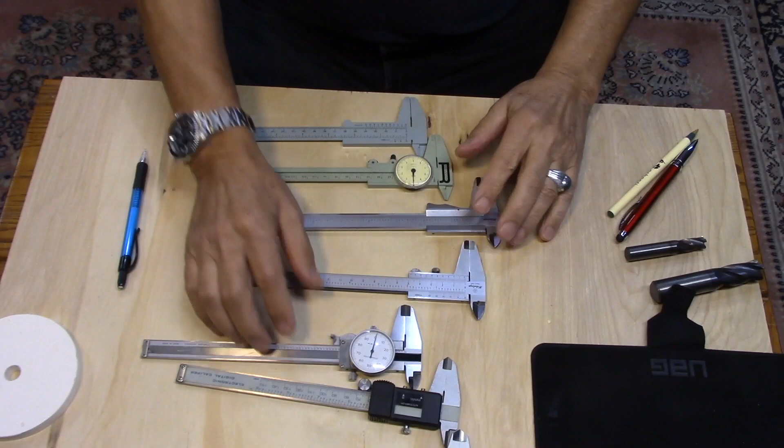Okay, here we have, I got about 7 different ones here that we're going to go through very quickly, just to show you what I have. So the first one, this one here, is basically a Vernier Caliper, and it's plastic. It's made in Taiwan. It's kind of cheap material, cheap vernier.

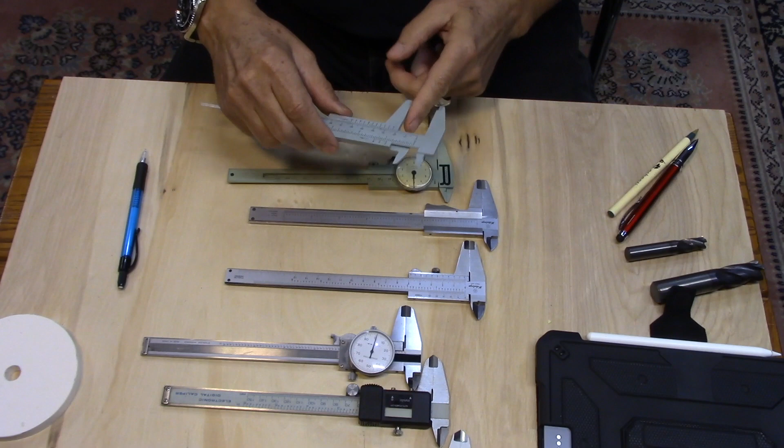I don't use it much. The reason that it's plastic, like if you're doing any faceting, they're saying, okay, you can put your facet in, you measure so it doesn't damage, but I don't use it. When I do faceting, I use the regular one. So if you don't use it as a vice grip, then that will work for you.

Okay, the other one that I have, this one here, it's also in millimeters, but this is a dial caliper. So a dial caliper, where when you move or try to measure anything, you have the dial here that's going to be giving you the dimension that you want. That's a dial, but this here is metric only.

Now, this one here is the Mitutoyo caliper and vernier, and it has only inches. So this one here is only inches. Then I have this one here, which is also Mitutoyo, but it has both. It has metric at the bottom and inches on the top. So you could use both of them.

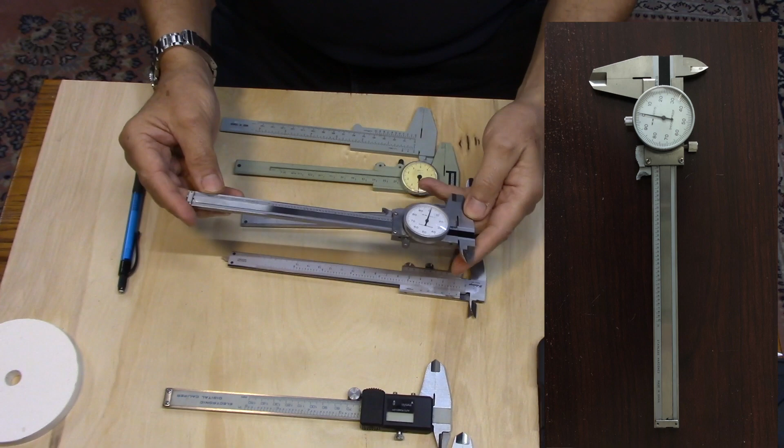Then there's another dial caliper, which has the dial indicator, and this is only inches. This is made in China. So when you turn it, every time you get the dimension, you can read it from the indicator. You get the points here and then the indicator there. So it's another one.

Then we have the digital caliper. So the digital caliper, this one has metric and inches also, and when you put it on, you could actually change it from metric to inches anytime you want, but we're going to go through how you use it later on.

This is another one also, a digital caliper, that's from Mitutoyo. As you can see here, there are no numbers, inches or metric. However, this one also will change from inches to metric by pushing the button here.

Now the other one that I showed you before, this one here has the numbers, metric and inches on it. This one has nothing really, but it acts the same because you're not using these numbers, you're just using the readout, so you can read the dimension that you have. But we're going to go through all of them. Now, this one here I'm just going to put aside because we're not going to talk about it.

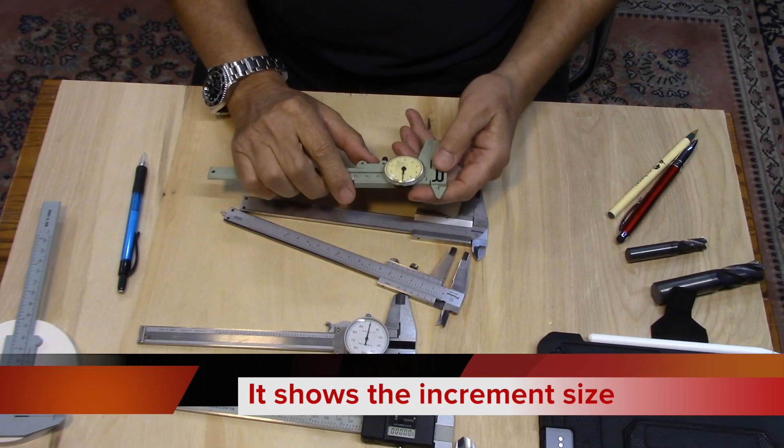The dial, if I look at this dial, which is metric, most of the tools, even this plastic one I really don't use, all of them actually show you how you read them, every segment or every line, how you can count it. So first, actually, before we go into this, let me show you how you can use the verniers.

First, how can you measure? What do you use it for? So I'm going to take one. Let's say this here. It's a simple one. So now we know that here is where you can measure everything. So you go in and you measure anything. So I have this one here. I'm going to go in and measure it that way, and I get my reading, which is fine. But then you have more than just this.

For instance, what is this for? This one here is to basically measure the inside diameter of something. So if I have this one here, I got a hole in the center.

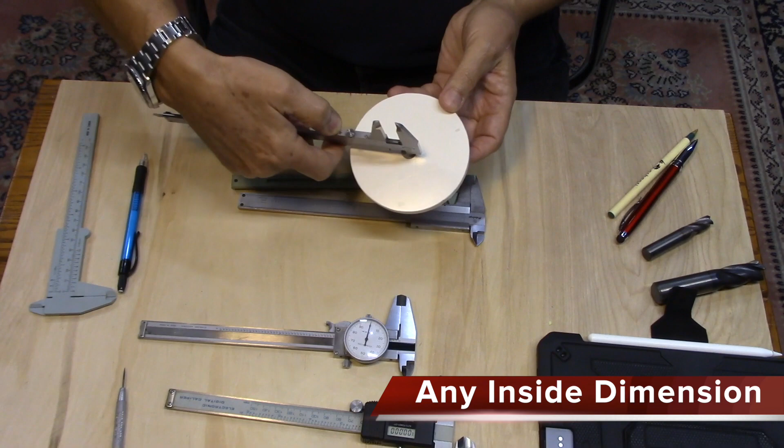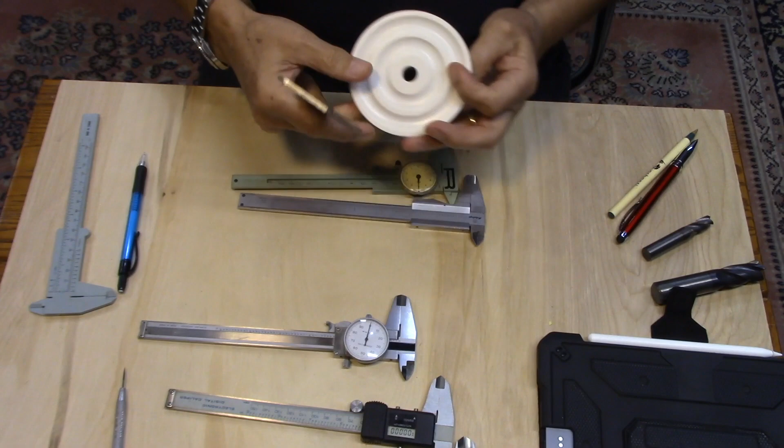Well, what do we use it for? Let's see. When it's set flat here, that's set to 0. So if I want to check the depth here, what I'm going to do is I'm just going to go from this point and I'm just going to set it up right here and go in like that. Okay, so then I can get the depth dimension it's giving here.

If you notice right here, there is a little relief at the bottom here, right there. So there is a relief, and that relief is for when you have something here at the bottom or at the corner where you're checking, you could just put it up that way. So this way you can measure without hitting any chamfer at the bottom, so you go like this and here you are. So you can measure this way.

So now we have this one here: inside diameter, depth of something. So you could also use this one, especially if you have something that is closed. You can always go from the top and measure the depth. Okay, so I can go like this and I can measure the depth, and I know exactly the thickness of this piece. So if you have, let's say, I don't have anything here, but I thought I did.

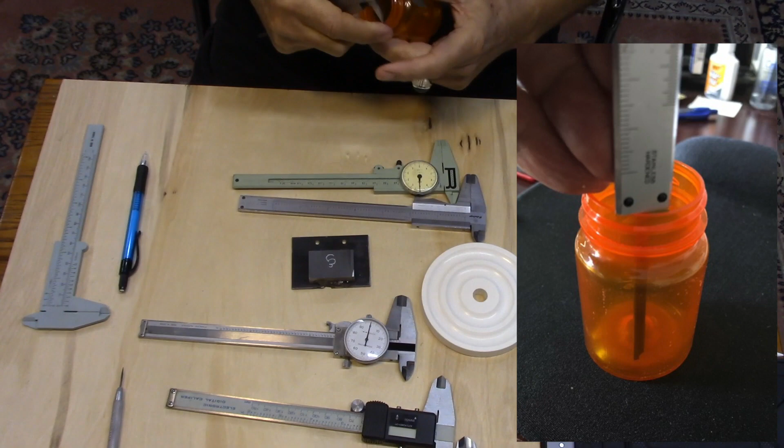Okay, so let's say I need to know the depth of this bottle. All I have to do is go on the side, make sure that it's straight, and go all the way down and check the depth. The dimension is right here, so I can see it. So for any depth that you cannot reach, this one is used, which is the tip.

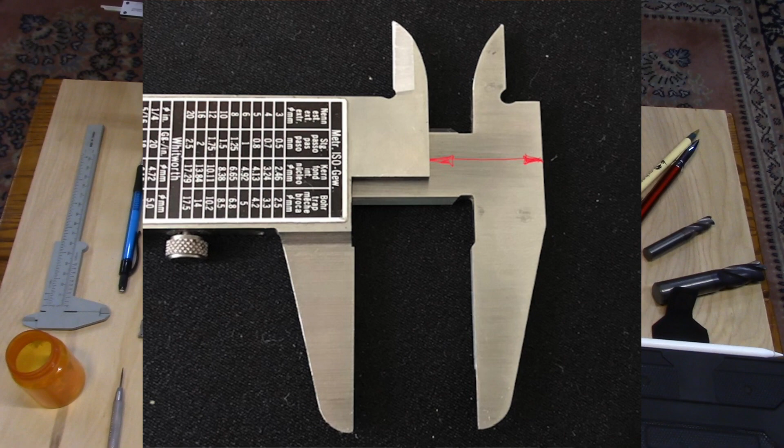Now there is another one that is right on the edge here. So if I use this one as my 0, now every time I move it, I get a dimension right there. So this is my 0, and here it gives me the dimension. So for instance, if I want to check again the depth of this, I can actually set it up right here and here. Push it in. Now I got a dimension.

So same here, I can put it right there, it's at the edge, and move it in, and here I get another dimension. So we're using this one here also for the distance that is blocked. I cannot measure it this way, I cannot measure it this way. I mean, you could, but it won't be accurate. I can measure it this way, yes, but this is mainly used for depth, for holes, okay?

And this here is used for getting these dimensions. So now we know we got 1, 2, 3, 4 different ways to use the vernier. Now all of them are about the same thing. Okay, you could use them. They all have the same features.

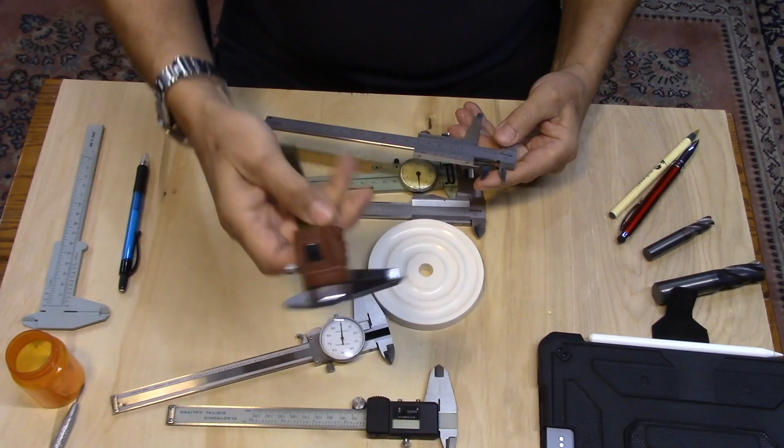Okay, so if I open this one, again I get the tail, the relief down at the bottom. I get the size for the inside diameter. I get the outside dimension, and I get also the distance on the back here. Okay, so these are the different ways that we could use these calipers.

Now, I don't know if you realized that I mentioned vernier and caliper. They're all calipers, but the difference is this is a vernier because it has the small graduations or divisions that give you the fine dimension, or closer dimension to what you need. So this is the vernier.

Now, this is the dial caliper. Okay, so the dial caliper is the same as this one. This is the dial caliper. So we have vernier caliper, dial caliper, and this is the electronic or digital caliper. So we got three different ones. They're all calipers, but they're for different applications.

So one thing that we need to watch out for is these are expensive tools, and I'm not talking about these plastic ones. I'm talking about the Mitutoyo that I have, and they're not cheap, but also they are not a tool that I can use as a wrench or a vice grip. When you measure something, don't push too hard on it. It's very delicate.

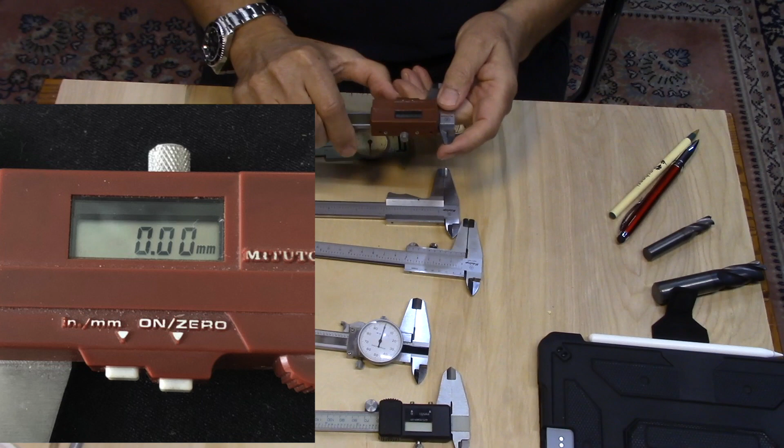nice and clean. The other thing is that if you drop it, you need to readjust it. This one here has a zero adjustment, but that doesn't mean the zero adjustment is going to fix everything, because if you hit it down here, do you know if it is correct or not? Correct. Now, I have these tools. These tools are perfectly ground and exactly to size. Not everybody has them, but most people have drills.

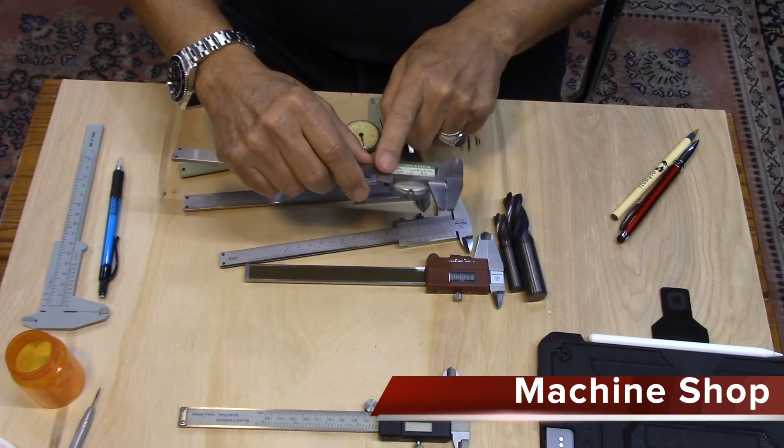So you can get a drill, and actually, let me go back. If you're working with a machining company that uses this tool all the time, they have to have the calibration done on these tools, and it has to be marked, dated, and signed, and done every 6 months. Okay, that's for ISO 9000. So you have to have this one always inspected. If you drop it, you have to take it back and it has to be re-inspected again.

But for us here at home, we don't have that luxury to give it to an inspection department so they can check it and make sure that it's correct. So what we're doing is, here I'm using these tools. And actually, I wasn't going to talk about this, but John Daniel mentioned it on Facebook, and I figured, okay, I gotta show you guys. He mentioned gauge blocks.

The inspection department usually has gauge blocks, but he said, well, if you don't have gauge blocks, which is a good idea, you could use tools like this. And if you don't have these, you could use a drill. But don't take any drill that's been used and is all marked up on the outside. Get a new drill. You know the size of it, and you just measure and see exactly where you're at. So that's a way you can actually adjust your calipers.

And if you look here, I'm going to get a closer look at this one in a little while, but the dimension, and I'm talking about metric now, this one has both metric and inches. So if we're looking at the metric dimensions, you could see the numbers on the top here, and each one is 10 millimeters. So this is 10 millimeters, 20, 30, 40, 50, and so forth.

Within the 10 millimeters, there is another line down here in the middle, which is 5 millimeters. It's a little bit longer, so it shows you the halfway point of the 10 millimeters. Let me show you this one here bigger. Okay, now you could see it. So, like I was saying, this is 10 millimeters.

The longer line here, which is 5 millimeters, 10, 15, 20, 25, 30 millimeters. Then we could see all these lines down here, which is also graduated, and it has up to 10. Now what's good about metric is everything is divided by 10. So now this from 0 to 10 is a division of 1 millimeter. So every millimeter is divided here into 10.

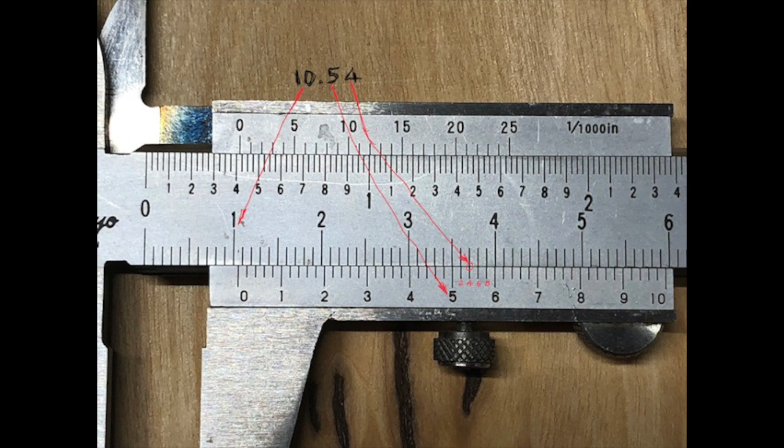10 millimeter, 0.5. Back to here. 0.5. And I figured that this one is closer. Okay. So I will take 0.5 to 4. Okay, so that's 0.54. Okay, let's take another example.

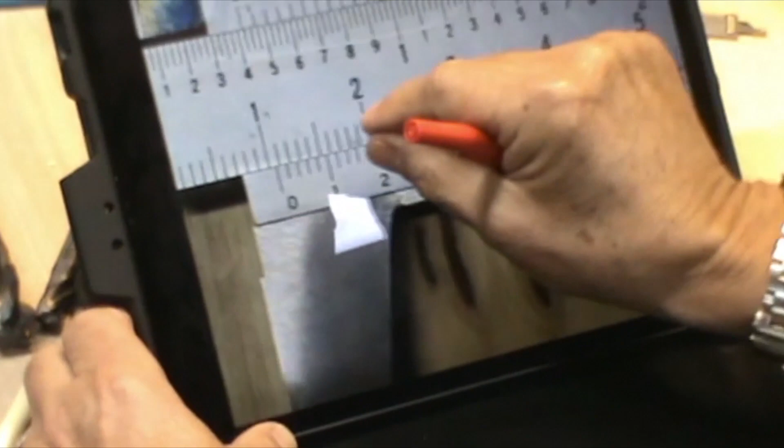Here's another example. Again, we're about the same area here, but if I look at this, I'm a little bit even over the half of that millimeter. So I know it's after the 5. So this is 10 millimeter point. Let's go back. Here is the 5, and here is the 6. Again, the

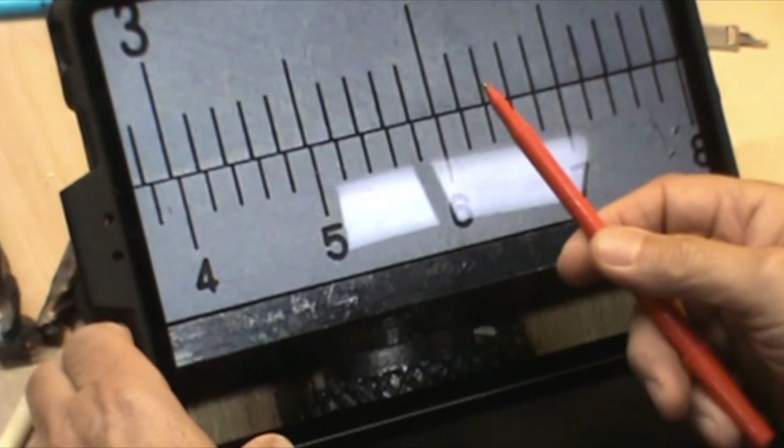dimension is, if I look at which one is the closest, now the 6 is over this way, but if I go to the 7, it's inside. So between the 5 and the 7 it's this way, and if I take the 6, it's in. So I know my dimension is between the 6 and the 7, right here. So the dimension is going to be 10 millimeter, 0.6 something.

So if this is 6, what is the closest number? I could see this one here or that one there. You can decide. The difference is so minimal here that for your dimension, I will say 2, 4, 6 right here. So that's 10 millimeter, 0.66. Does that make sense? Here you go. So 10 millimeter in the front, 0.6 and 6.

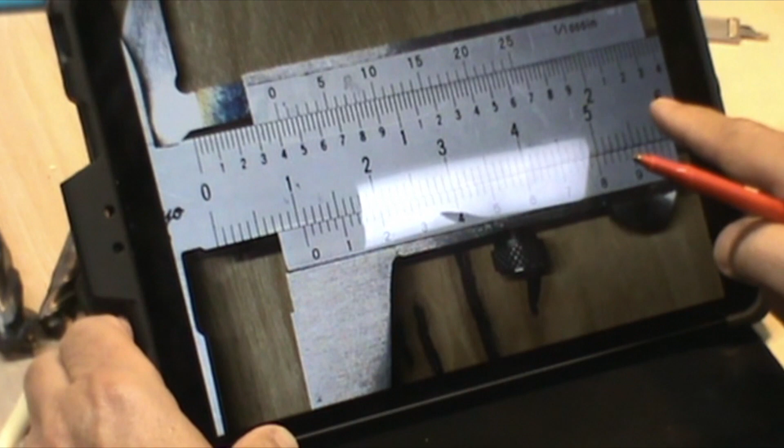So this is the way you actually measure with the metric system. That's how you use the bottom portion and the top portion. So going back to this, we know that everything is divided into 10 millimeters for each number on the top here. Each 10 millimeter has 10 divisions, with the 5 in the center a little bit higher than the other ones. We have the 0 point, which is this one here, that if you close the vernier, it will be at 0, lined up.

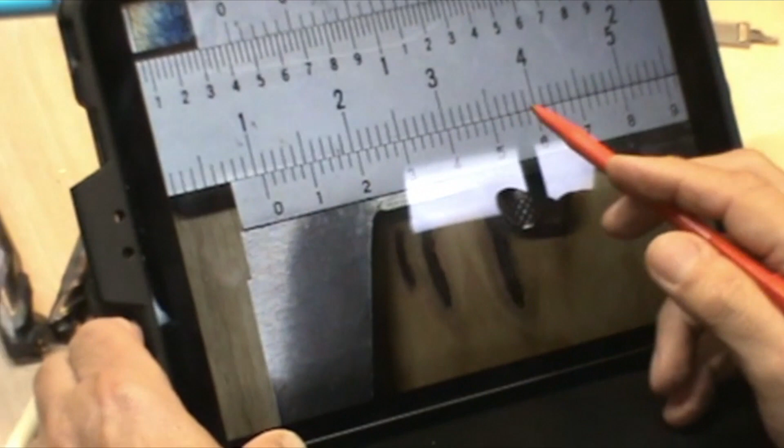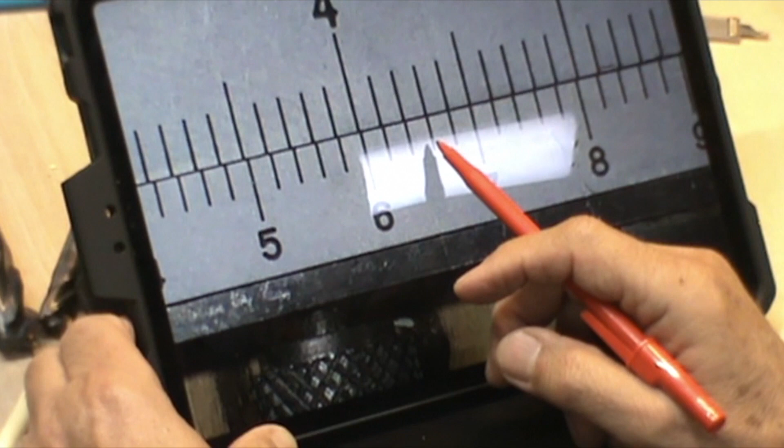And then when you open it, you check from that 0 point where you are on this millimeter. So this one here is 10 millimeter, 0.5 something, and that's the first one we did. And this is the second one. It's a little bit more than the 5, so we found out it's between 6 and 7. So it's got to be somewhere around here, and sure enough it was 6, then another 6 or 7. If I have this one more in line between these two, I could say 0.67, because it's 2, 4, 6 up to this point, and if it's between these two, that will make it 7.

Okay, so that's the side here. So if we're using this one here, this is my 0 point. So when I go here, it's lining up at 0, and then I go in and check any dimension I want, reading the smaller increment down here at the bottom, and that will show me exactly what I need.

Okay, so this one here, it's a lock-in screw. So I can go and get any dimensions, lock it in position, and that's gonna hold it from moving. Just held like this, and it's gonna stay. If you need to go and measure something else, see if it's the same or not, then you'll be able to lock it in position. Okay, so that's one.

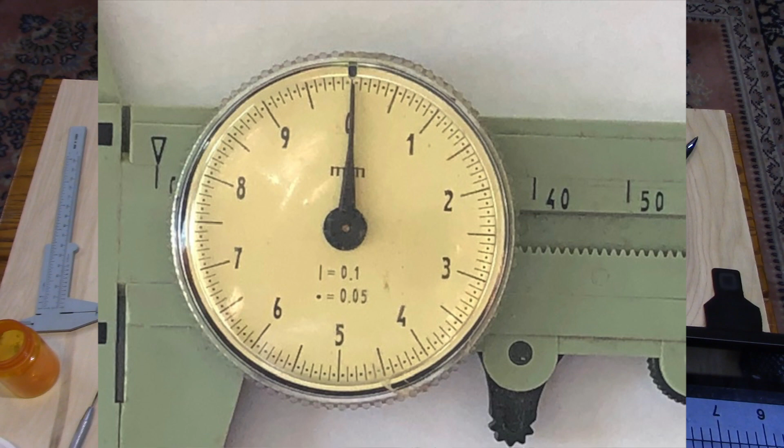The dial indicator, which is this. Again, because we're talking about metric, I'm going to use this plastic one. This is a dial indicator, so that's a dial caliper. Again, you could use inside diameter, the outside here, from here to there. You have also the tail measurement for inside dimensions.

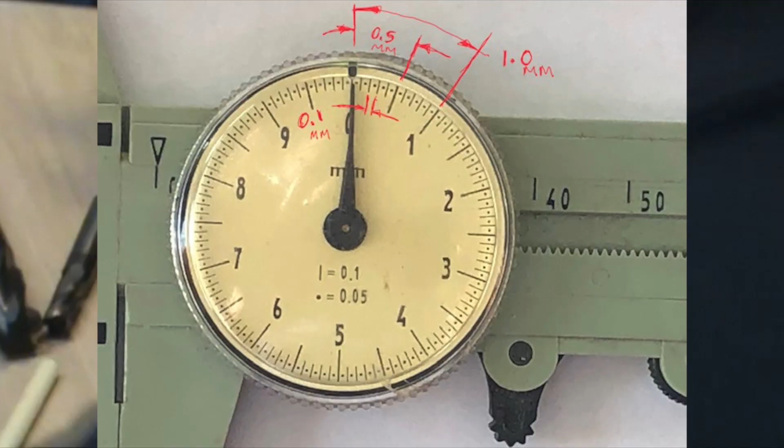Now, this one here, each rotation or revolution is 10 millimeters. So if I go to 0 here, that means I got 10 millimeters. So each division in between is 1 millimeter. So this is, if I go back here, this is 1 millimeter right there. Let me show you that on a bigger one.

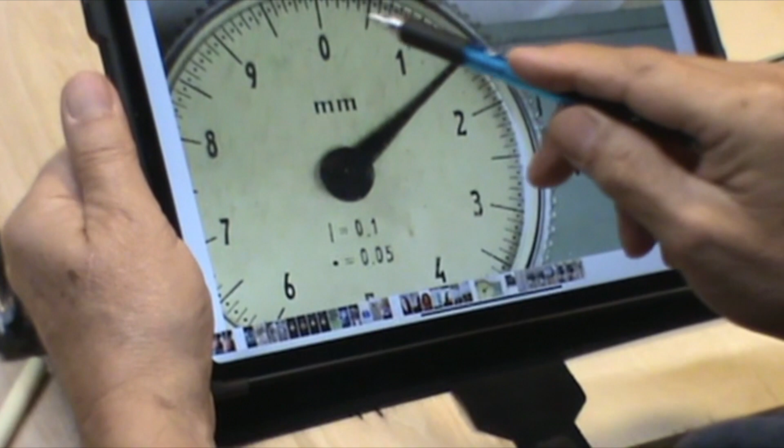Here it is. So each one, if I go like this, that's 1 millimeter. That means that, here you go again, from here to here is 1 millimeter. Okay? It's like this. That's 1 millimeter. 1 millimeter, 2 millimeter, 3, 4, 5, 6, 7, 8, 9, 10 millimeters.

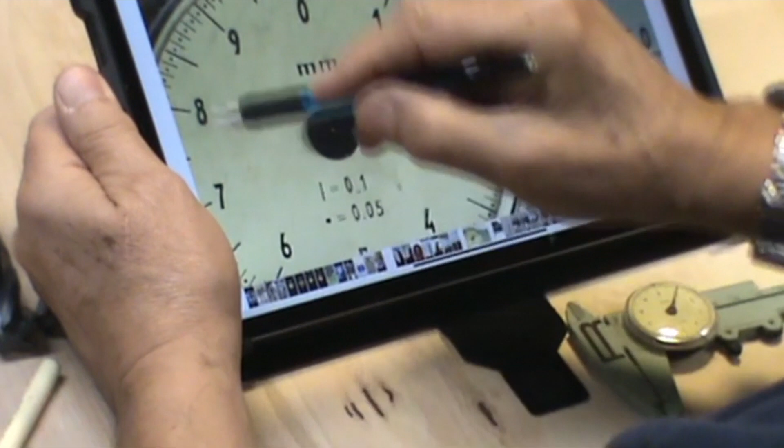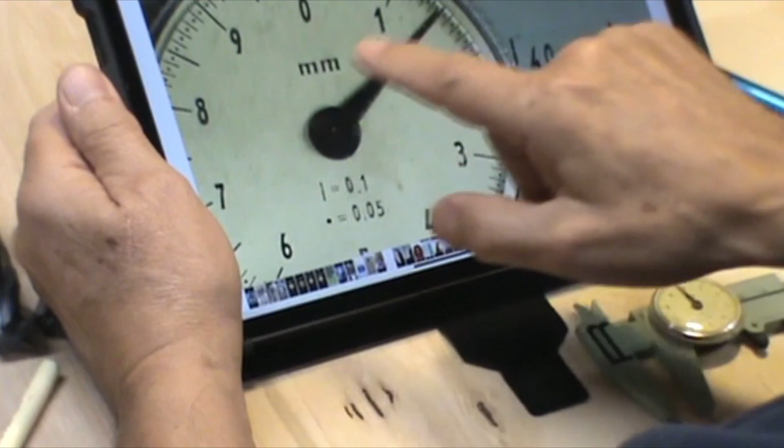So again, this one here, each full revolution is, we said, 10 millimeters. Okay. So when the dial turns around from 0 back to 0, that's exactly 10 millimeters. If, let's say, we're going from 0 to here, so this will be 1 millimeter point 1, 2, 3, 4, 5. That's a millimeter and a half right there.

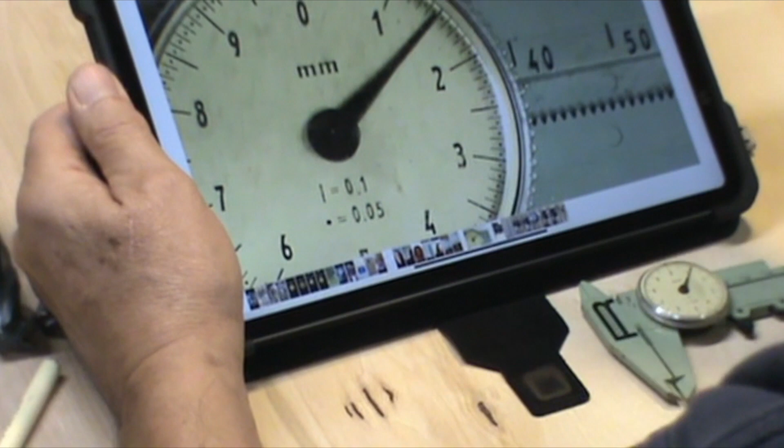1 millimeter and 5, 1, 2, 3, 4, 1, 2, 3, 4, 5.5 up to here, or 5.5 is on the dial. So 5.5, 6, 6.5, 7, 7.5, 8, and so forth. Keep going with that. So this is the dial indicator.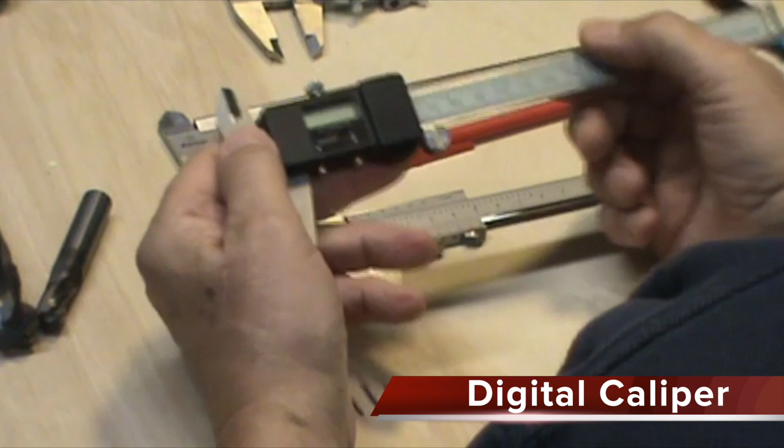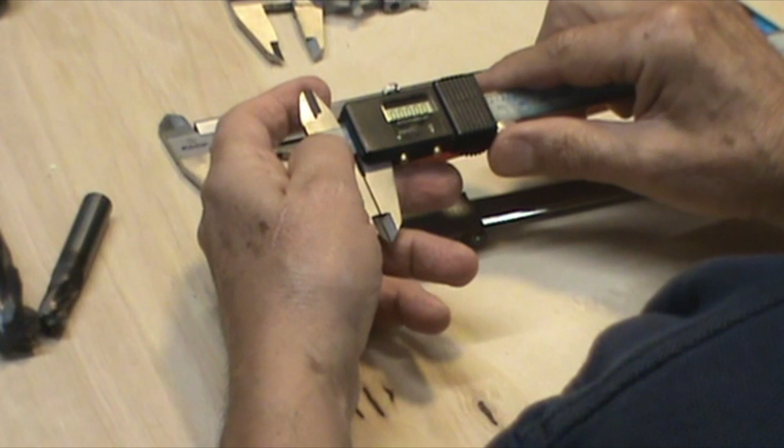Okay, this over here is, again, metric and inches. We have the millimeter and inches buttons right here. The 0 is the setting right there. So if I push this one here, it will show me that this is millimeter. If I push it again, it will show me that this is inches. If I push this one here, it will go to 0. So it doesn't matter where I have it, I can push this one and it will go back to 0.

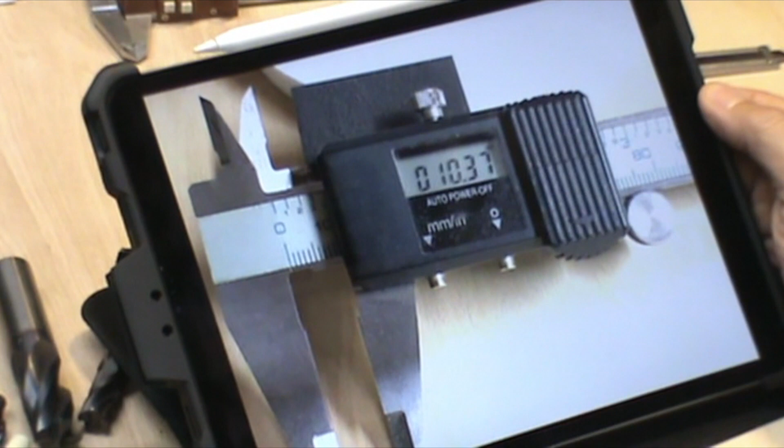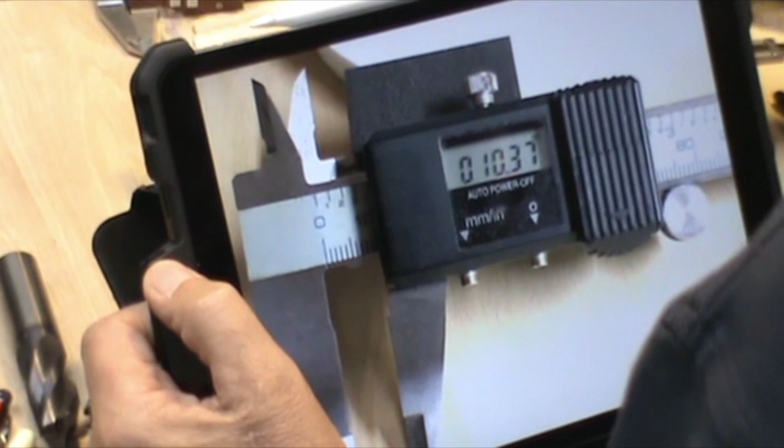Okay? Now, let me get you a closer look. So that's 10 millimeter, 0.37. So this is easy to do. Now, you could see the millimeters right on the top. If I push this one, I don't know if I have another one with the, no. Okay. What is it? Here it is.

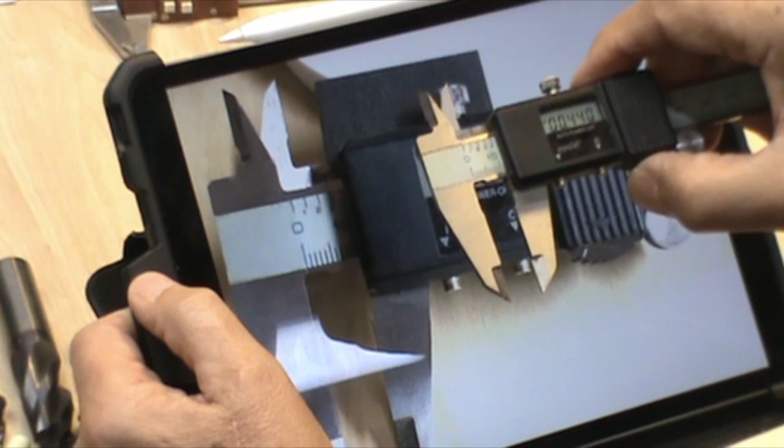So if I push 0, it's 0, and if I go whatever size here, I got 11.17. If I push the millimeter into inches, it will tell me that this is 0.440 inches. So I can change between metric and inches just by pushing that button. Then I go back to 0, set it up to 0.

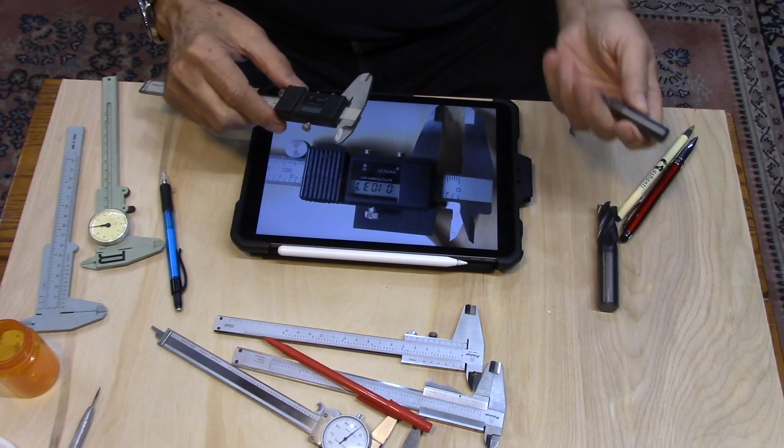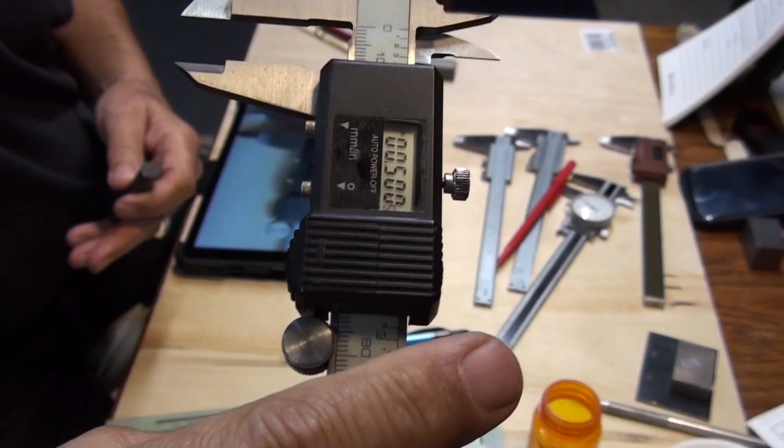Going back to adjusting your dimension. If you drop this one here, I'm going to have it in inches because this is in inches, and it's 0. Then I go in and measure this one here. And that gives me 0.4, actually 0.5 right there. I'm not pressing hard on it. That's 0.5. So I know that this is 0.5. My measurement here is 0.5. So I know that this is correct. Okay.

Now, the other thing I was talking about, where you could actually set it up to 0 from this point. I'll show you what I'm going to do. If I set this one to 0, we know that this is ½ inch. Now it's 0. If I go and I measure that bigger one, this one was, I believe, 3/4. Yeah, that's 3/4 of an inch.

So if I go back here, that is going to give me basically the difference in the diameter. 250, 249, 250, right there. Okay, so that gives me the difference between the two. Okay, let's talk about this one here again. That's in inches and also in metric.

So any dimension that I take, it's a readout. I'm going to see the dimensions right on the top. So that's a lot easier to basically measure anything and get the reading out. So this one here, it's open at 30.12 millimeters.

So if I press the button down here, it will go from metric to inches. It's going to look like this. Oops, that's the wrong one. It's going to look like this. So when I push this one, it's basically 1.186 of an inch. So you could actually reverse between metric and inches by pressing the button. Okay?

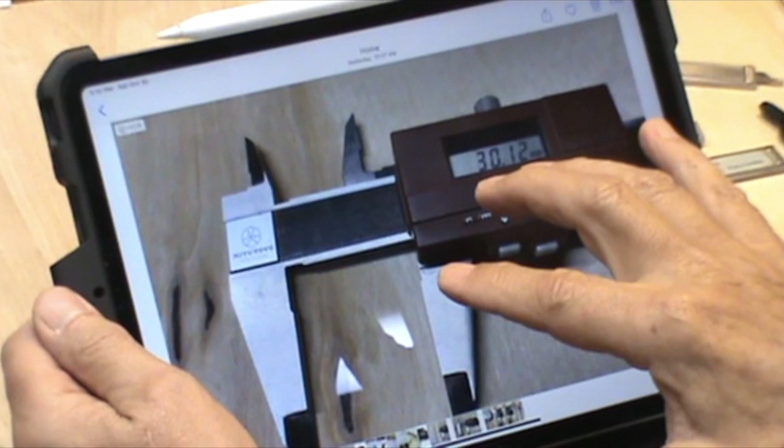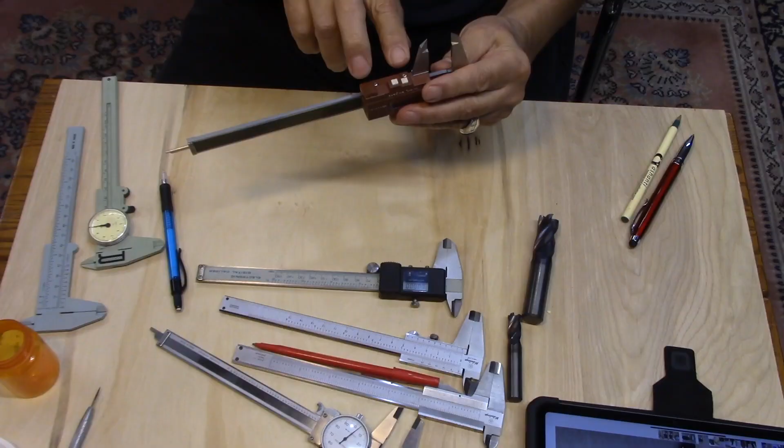Now, these here actually take a battery that is fitted inside. This particular one has 4 bolts, 2 on this side, 2 on the other side. The top comes off and you change the battery on the inside. Again, like I said, there's no graduated line. You don't have to read anything. This is a lot simpler: you get any dimension, any size, and you will read it right here.

The other one is the dial. Now with the dial, you're going to see the dimensions here, and then the decimal point is over here. Okay, so now this is the metric system. And these two, like I said, you basically change and it goes into inches.

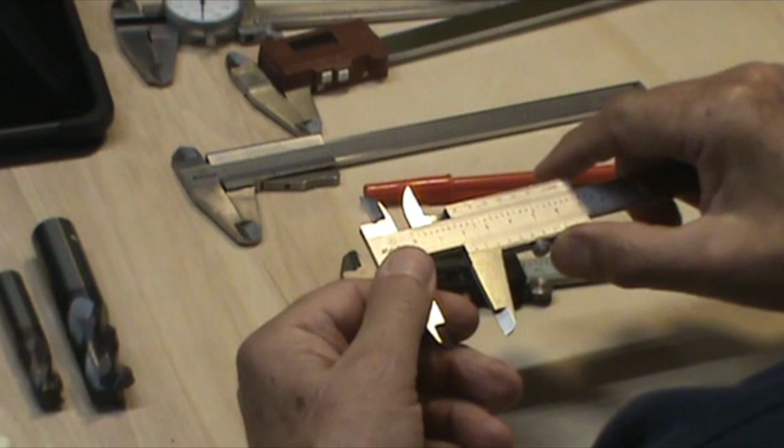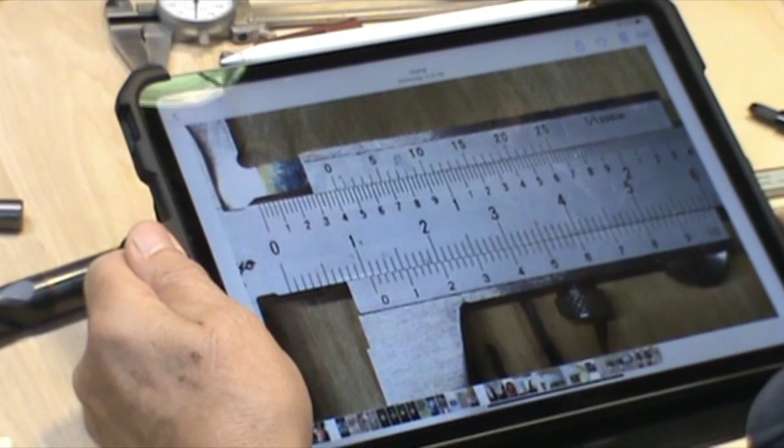But if we have this system here, now I got this one here, it's all inches, but the lines are not as dark as this one. So I'm going to use this on the top to show you the dimensions that we're trying to calculate as inches. Let's see if I can see it back again here. Okay. Let's take this one here first. So now we have the inches on the top.

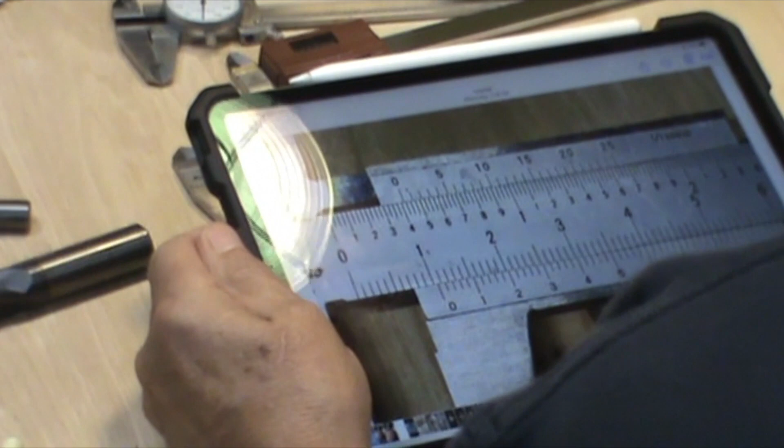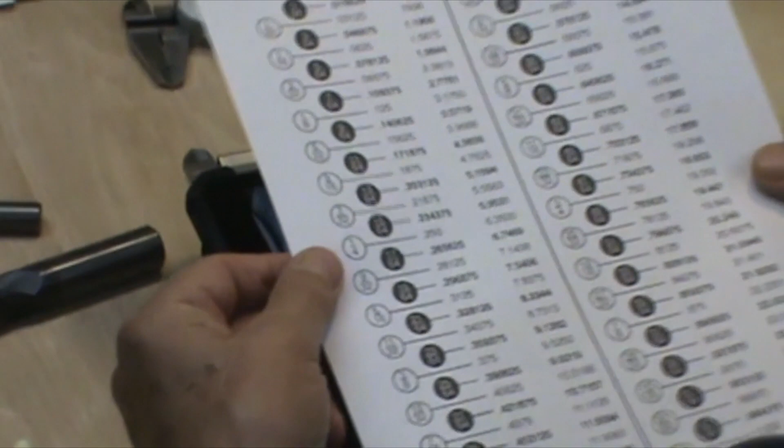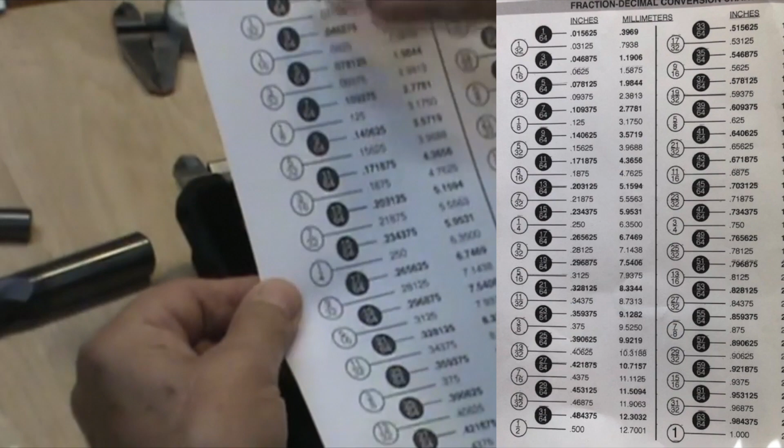Now the inches, it's a little bit difficult. With the metric, I said everything is divided by 10. The inches are more complex. Let me show you. 1 inch is divided into 64ths, 1, 3, 5 64ths, 1/32nd, divided into 16ths, and divided into 8ths, 1/8. So there are a lot of divisions here that you got to go through. The most common ones are the 16ths and the 8ths.

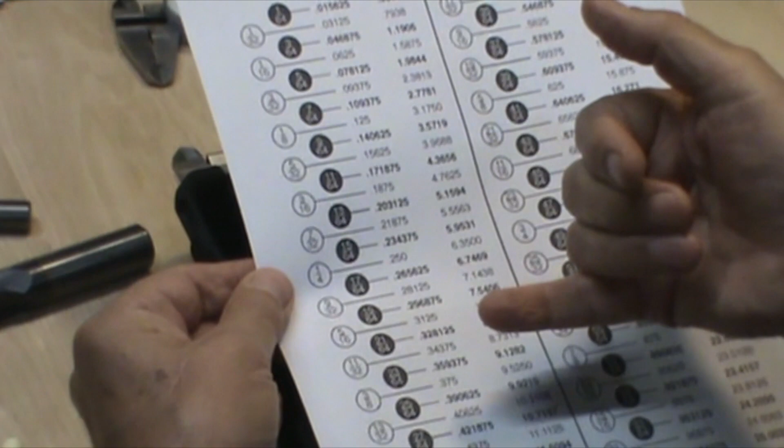If I go 1/16, you get 3/16, 5/16, 7/16. These are more common or more used. If I go into the 1/8, you get 1/8, you have 1/4, you have 3/8, and you get 1/2 inch, and so forth. Okay. So these are the divisions here.

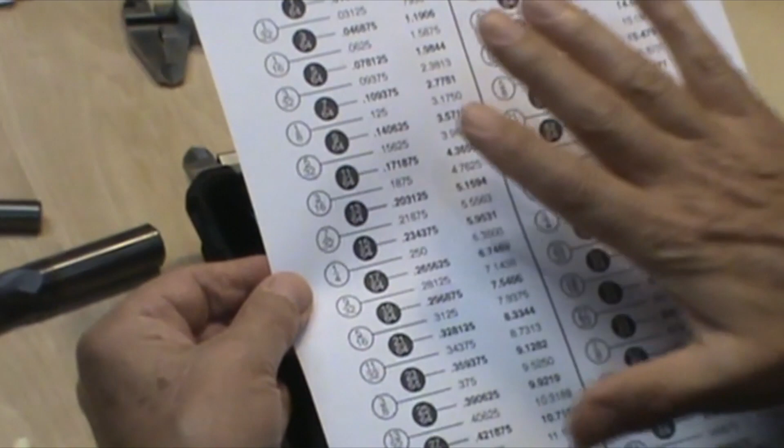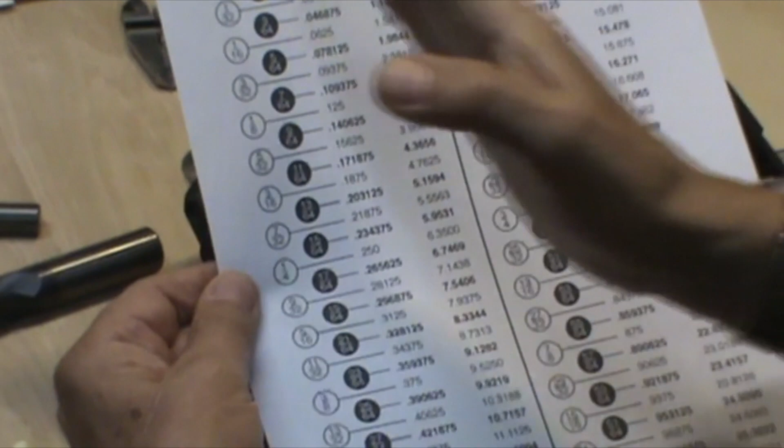Now, this chart you could actually download for free from the internet. You can go in, download it, and it's pretty good because it shows you all the fractions. And with the fractions, we also have the decimal, which is right there. So if you want to calculate finer dimensions, you're going to use the decimal. Also, this chart has the conversion into metric, so you can go from inches to metric. It's right there.

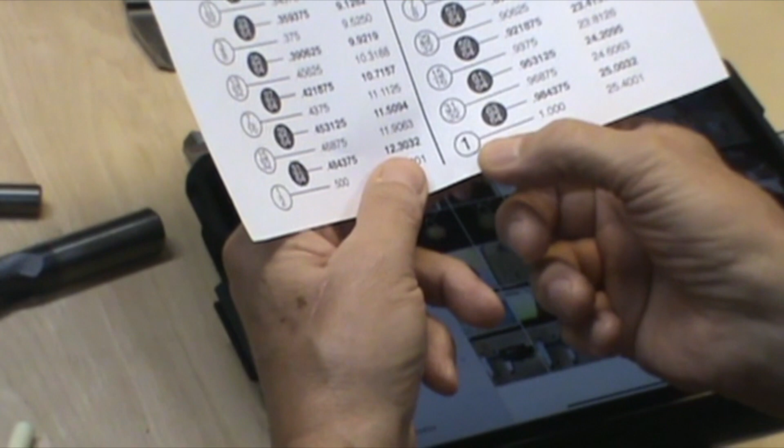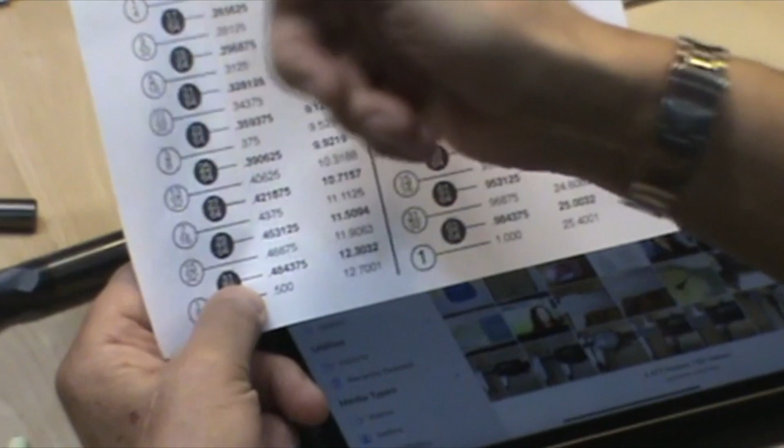Okay. Now, it's also good to know if you want to convert it yourself: 1 inch equals 25.4 millimeters. So knowing this, you could also convert it yourself anytime. So this one here is a quick view of especially the fraction dimensions into decimal. You can calculate it right away. Okay, so we go back to this.

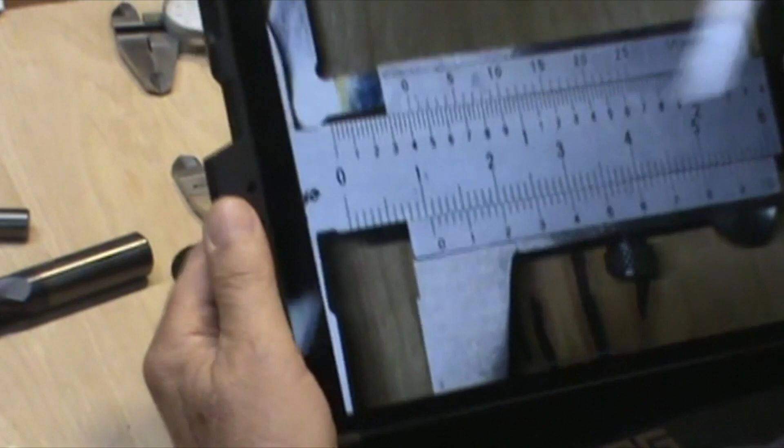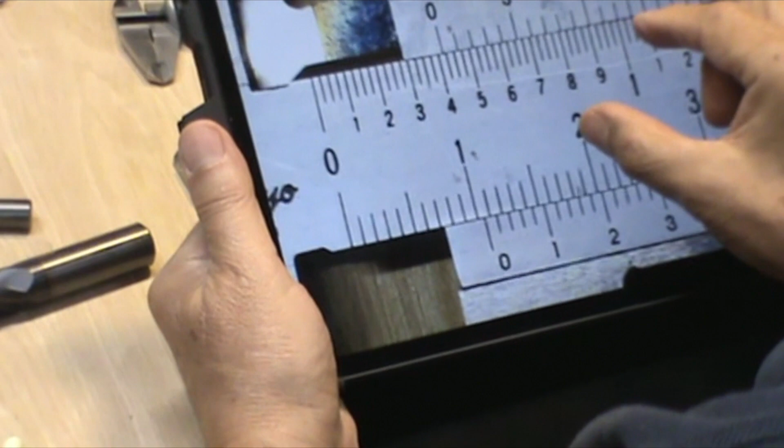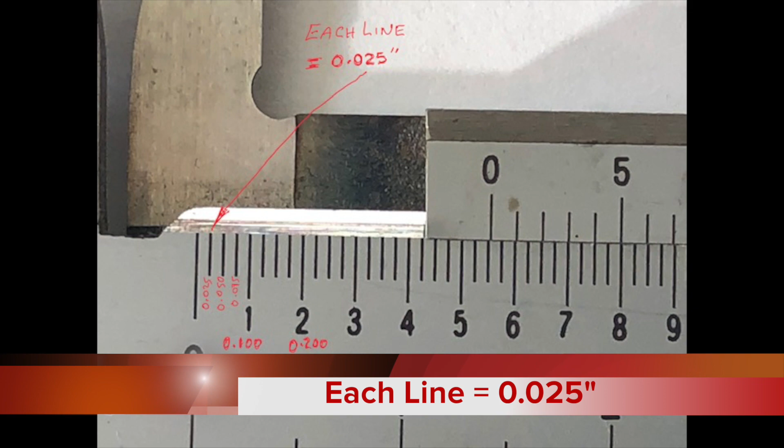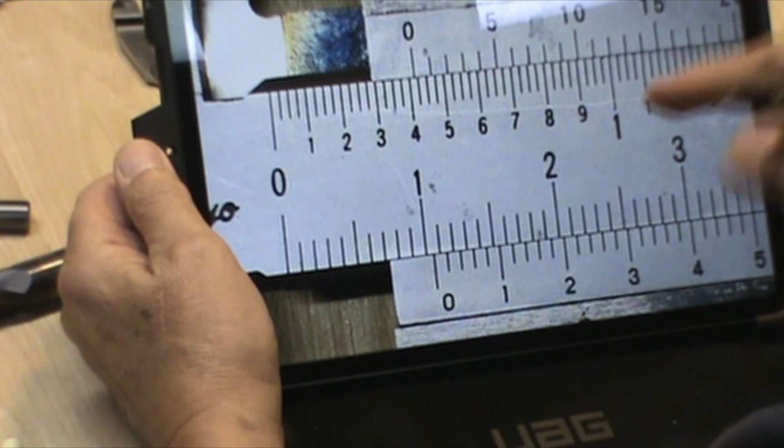And how do we measure the fractions here, or how is it divided? So 1 inch, let's go like this. Okay, so 1 inch, which is here, is divided into 100, 200. Each number here is 100. So 1 inch is 1,000. That's 100, 200, 300, 400, 500, 600, 700, 800, 900, and 1,000. So that's the division of the inches, divided into 1,000. So a thousandth of an inch.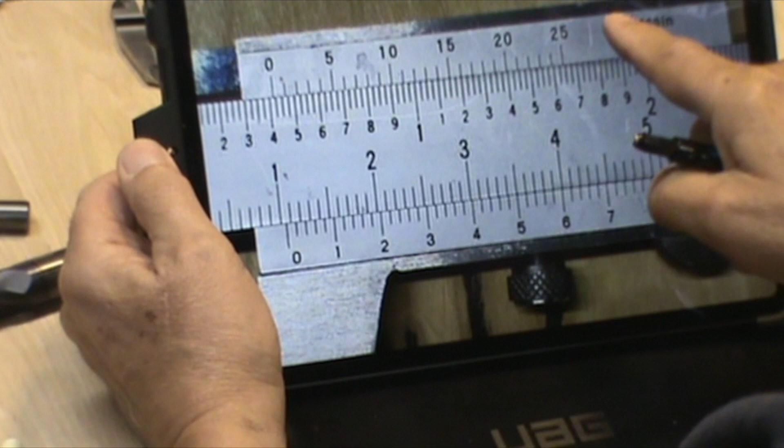Now, if I look at the top dimensions here, it's the same as we talked about before with the metric down here. They look large, but actually it's not that much. So here every division is 1 thousandth. So from here to here is 5 thousandths, 10, 15, 20, 25, and so forth. But each division here also, you get 1, 2, 3, 4, 5, 6, 7, 8, 9, 10. See that? So it's all divided into 5 divisions.

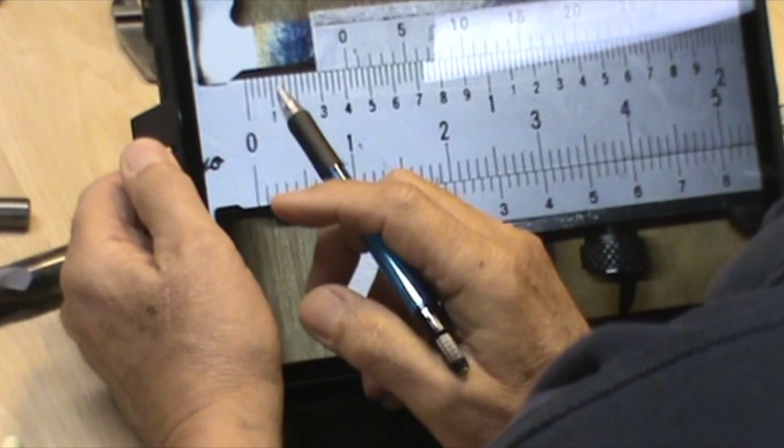So if we're going to read the size that it is right now, I know that this is 400-something right here.

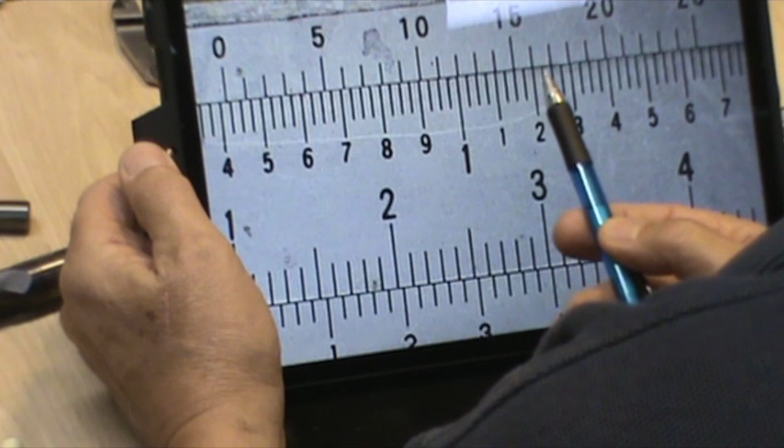So 400 and what? And then you go down here and you look at the line that is matching down here. And if I go across, I could see that here we're getting closer, right there, here. So this here, see that? This and this lining up. So 15, 16.

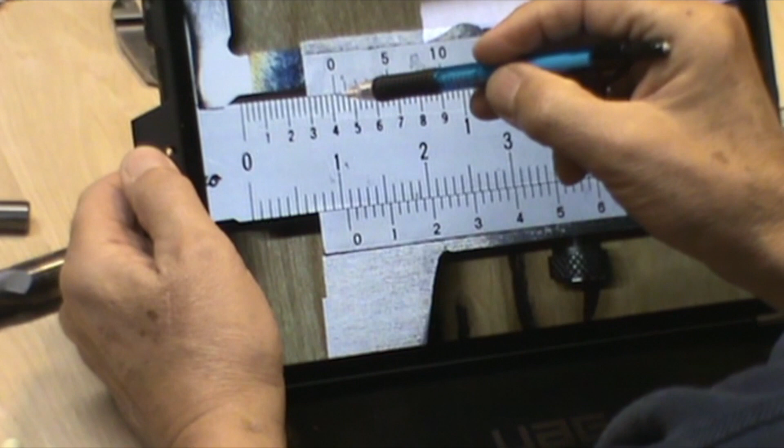Point 400, because we didn't go to the 1 inch or 2 inches, 3 inches. So still point something. So that's point 416. That's the dimension here. Half inch, which is right there, it's 0.500.

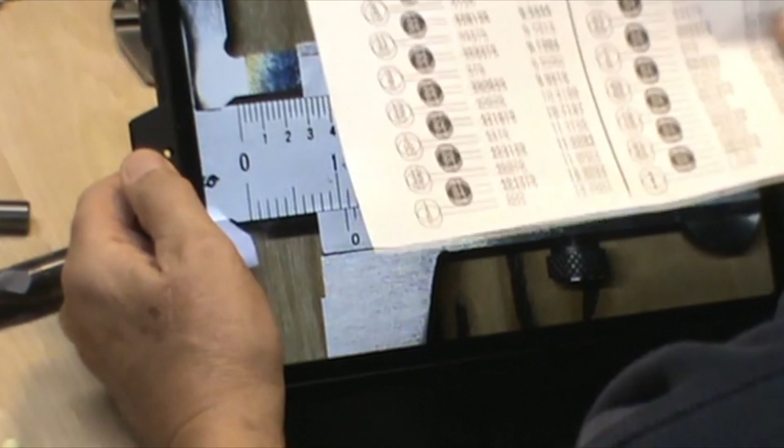So let's say we're going to fractions, which is this one here. If I take the quarter inch, it equals 0.25 right there. Okay, so how do I see it here? 0.250. So here between 1, 2, 3, 4, 5. These are 5. Okay, so right in the middle, each one is 25. See this one here is 25. So each one is 25.

225, 250 is going to be right there. 300. And so forth. 325, 350, 375, 400. 375 is basically 3/8. Now there are other dimensions. Okay, let me see into this one here. Now I am not sure if I have a picture of that or not.

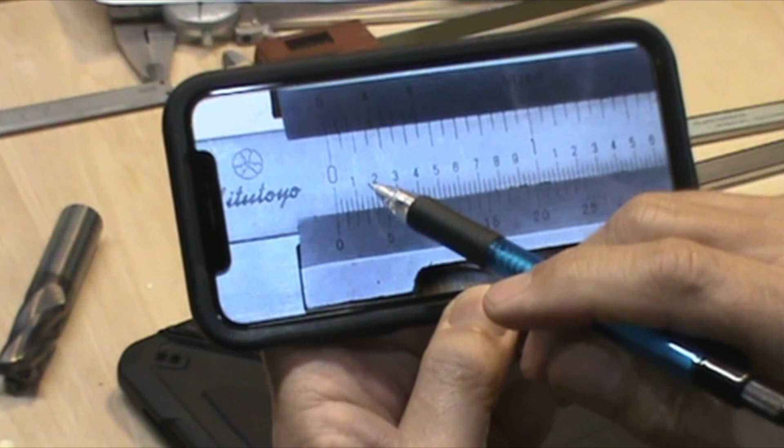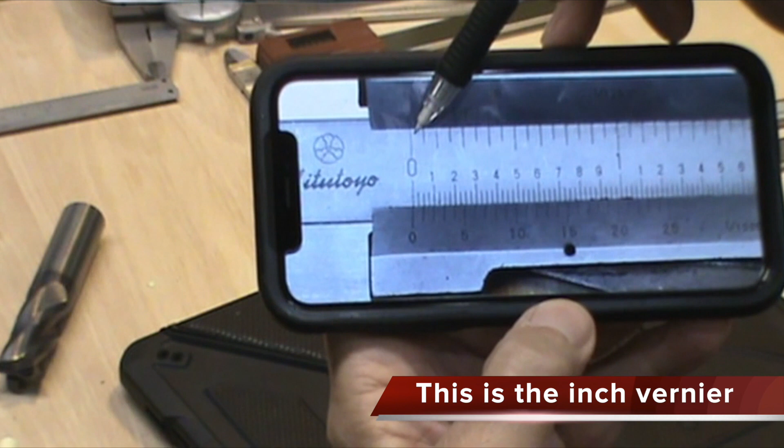Like what I was talking about, this one is the 100s. 1, 2, 3, 4, 5, 6, 7, 8, 900, 1000. That's your 1 inch. The 1 inch is divided into 8ths, 1/8, and 1/16. So this is 1/16. This is 1/8. This is 3/16, which is 1, 2, 3 sixteenths. That's 4/16, which makes it a quarter inch. 5/16, 3/8, 7/16, ½ inch.

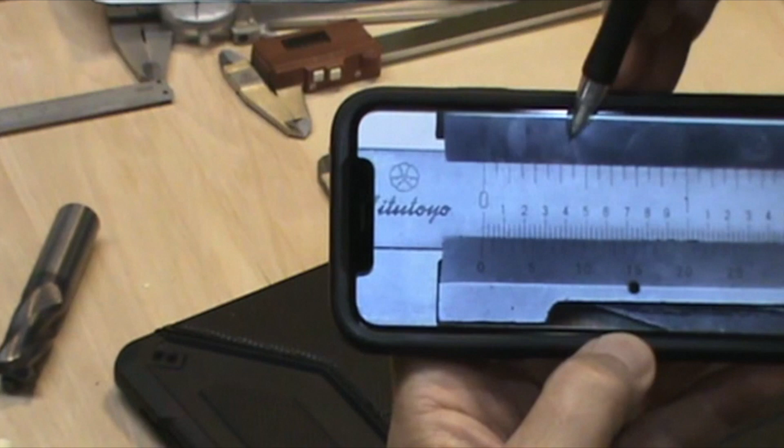So each division here is 1/8. The longer lines, 1/8, another 8th, another 8th, another 8th. That'll make 1, 2, 3, 4. That makes ½ inch. 8 of them makes 1 inch. Okay, so that's basically how it is divided here. And then the smaller dimension, you could figure it out from the top here. But as I said, usually you're going to use this system here, or these dimensions, to figure out exactly the actual size of your dimensions.

Okay, just to summarize everything back again. So we have different calipers: Vernier caliper, digital, and dial calipers. There are a lot of different ones you could buy. But whatever you do, make sure that you keep them clean. Don't use them as a vice grip, please. Make sure that they're clean when you put them away, and they will last you all your life.

So again, if you drop it or you think that the dimensions are not correct, get yourself a brand new drill or a tool, and go in and measure it. Make sure that it is the right dimension. And another thing, when you go in, just clean it. Use your finger, clean the tips, put it back again, and set it to 0. Okay, that's your setting. And then you can go in and measure anything you want.

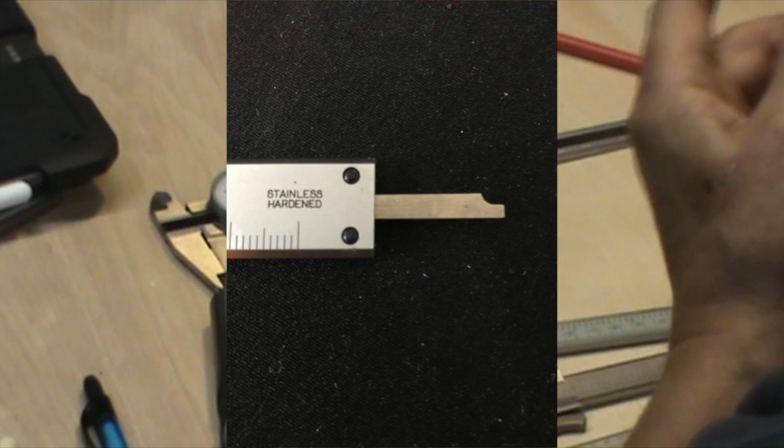Again, you can measure inside or anything from the outside. You can measure a diameter from the inside using these here. You can measure the depth of anything using the tail. And also you could measure the distance on a flat surface like we did before using the back. So this is another way of measuring from the back, from 0 to here. That will give you the size or the distance that we're talking about.

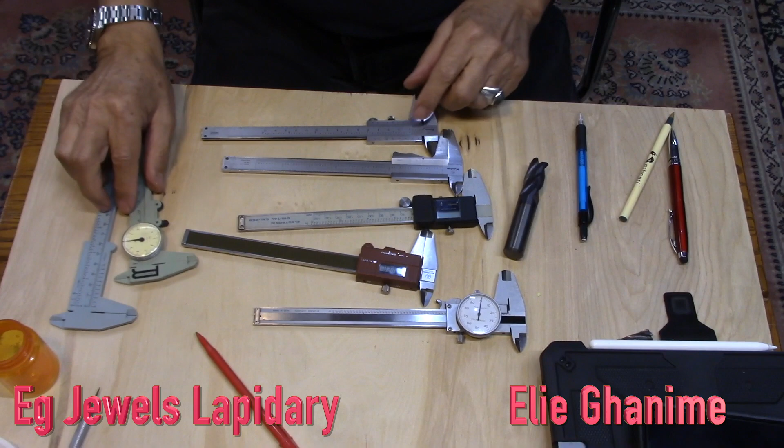Okay, I hope this is everything we have today, and I hope I summarized everything for you between metric and inches. I'm sure you're going to be using more of the metric. If you're working with jewelry, you're going to be using more metric than inches, but you know both of them anyway. Get yourself a chart like this that will help you convert from inches into millimeters.